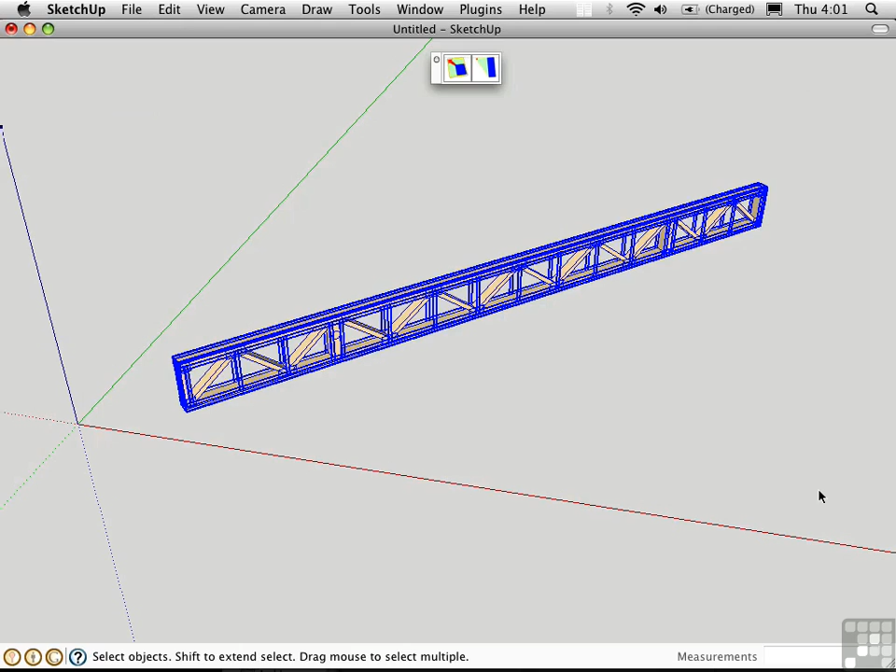You can run into challenges when trying to scale objects that are at an angle with respect to the red-green axes. Take this engineered truss, for example. If I try to scale it using the SketchUp Scale tool, I get handles that are arranged according to the red axis and green axes. This doesn't really let me be accurate. If I try to do this numerically, something's going to get distorted.

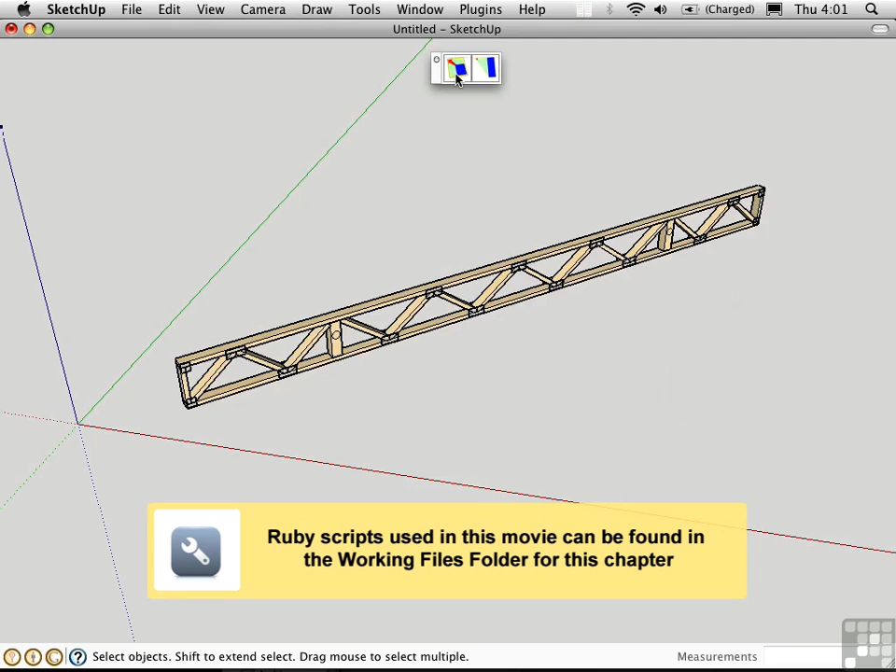Undo. A better way to do this is to use Fredo's FreeScale tool. This allows you to scale according to the orientation of the object. So now I can scale it in this way. I don't need to worry about what angle the object is with respect to the axes.

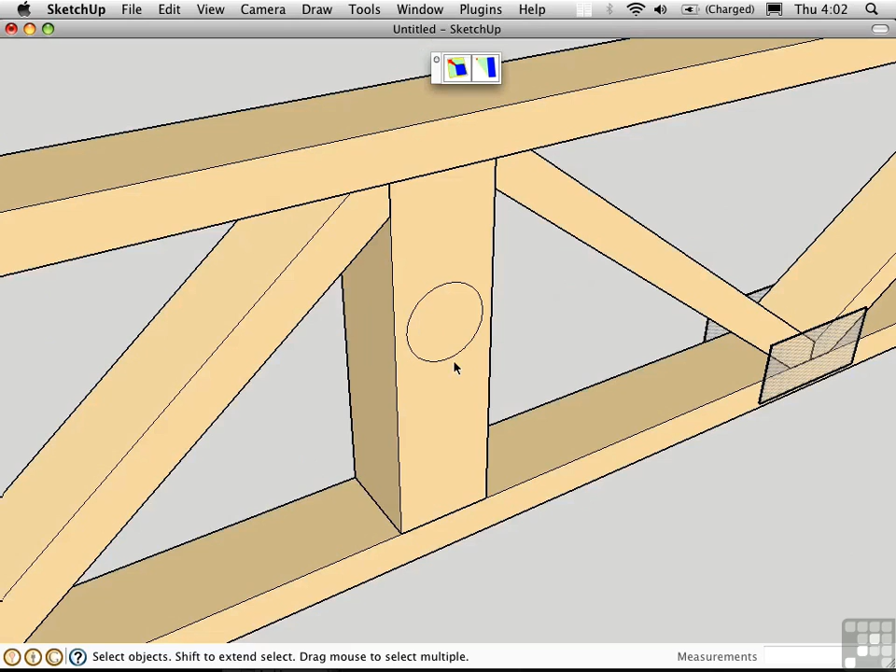Undo. This tool is also supposed to work on curves on surfaces like this circle, for example. Let me go into this component and select this circle which is drawn on this surface. I'll use the FreeScale tool. The orientation here is almost correct. I can make it bigger or smaller, but it's off with respect to the vertical axis.

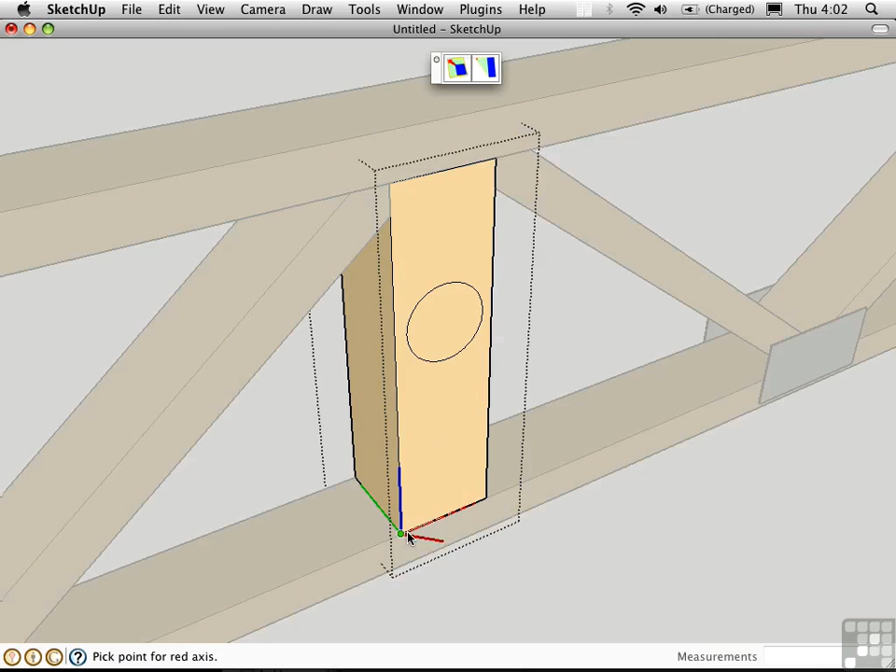Undo. Perhaps a better way to approach this problem is to actually change the drawing axes. If I try the regular SketchUp Scale tool, this is the result, so that's not going to be very useful. Instead, what I can do is press Option A to reset the drawing axes, and I'll make them coincident with the component axes. Now I should be able to select that and use the regular SketchUp Scale tool to correct the problem. Let me reset the drawing axes by pressing Shift A.

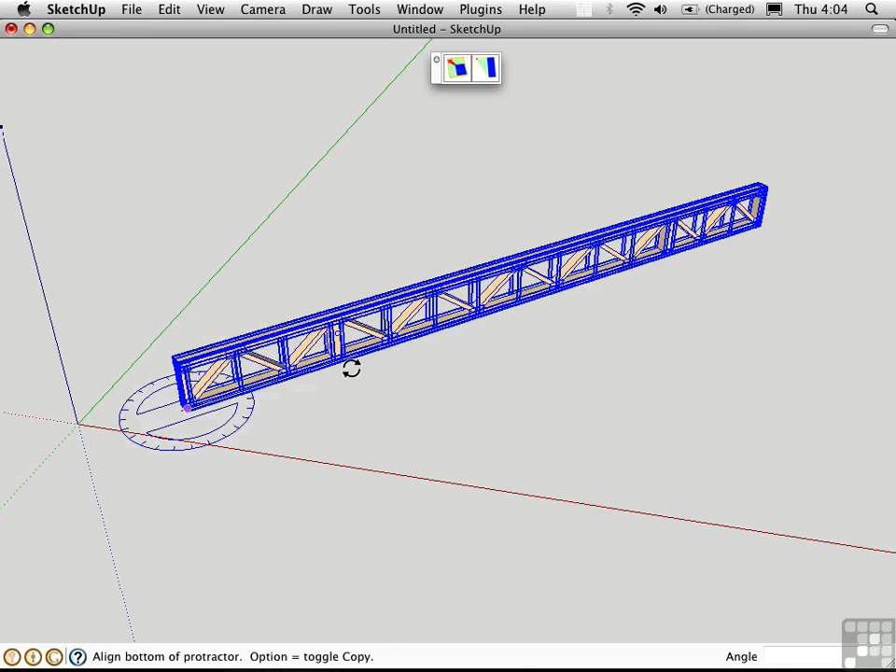Another approach to scale is to select your objects and rotate them into an orientation which is coincident with the drawing axes. Then make a group or component of the object. Rotate it back into the orientation it was before, and then use the SketchUp Scale tool. Its axes will be aligned with the object because the component or group was defined when it was oriented with the drawing axes.

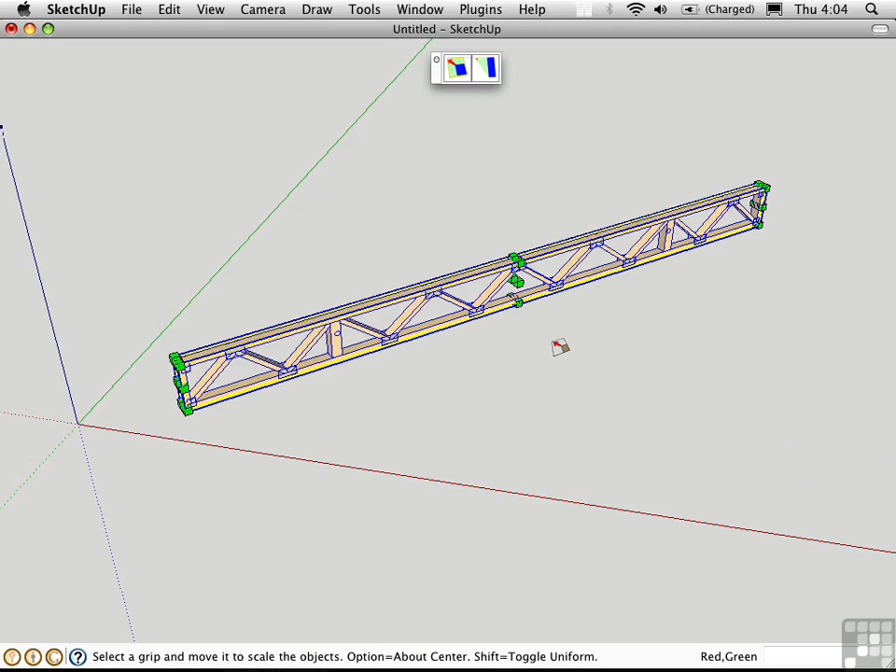There's another tool on the FreeScale toolbar that allows you to taper objects while you scale them. I'm going to unhide a sphere which I created earlier. I'll triple-click the sphere to select all, and then use this tool. It has this peculiar bounding box surrounding the object, with green thick lines connecting all of the handles. This indicates that you can scale the bounding box itself to deform what's inside.

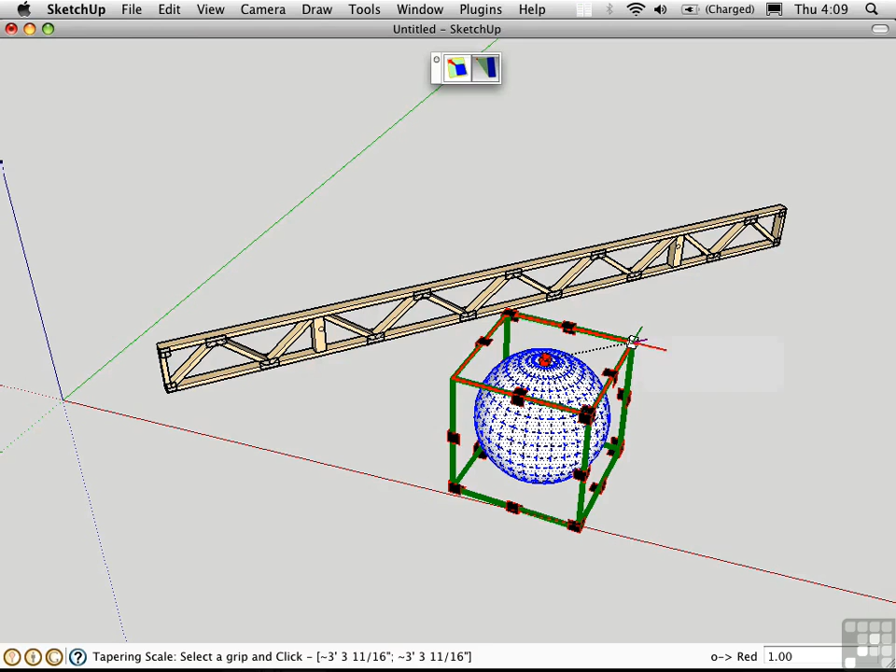There are two modes just like the SketchUp Scale tool. There's Uniform mode and About Center. Press the Option key to scale about the center. Now I can scale this down and instantly make an egg by deforming the object with Taper Scale.